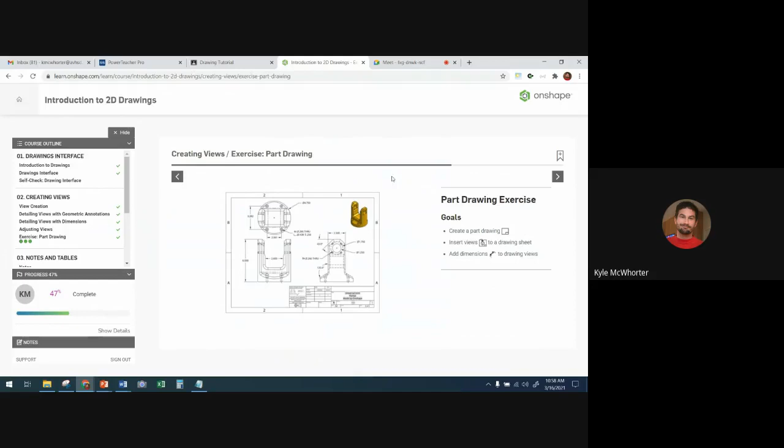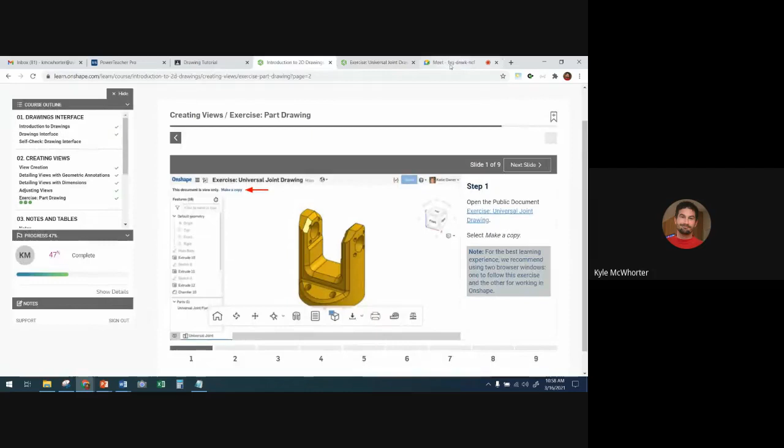Okay, so we are going to make these drawings, okay? So the first step is to open this public document. So you're going to click on this. And then we need to make a copy. So right up here where it says this document is view only, we need to make a copy. So click on that. You can name it if you want to. Change the name, put your name on it, something. So now we have our own copy of this part to work with.

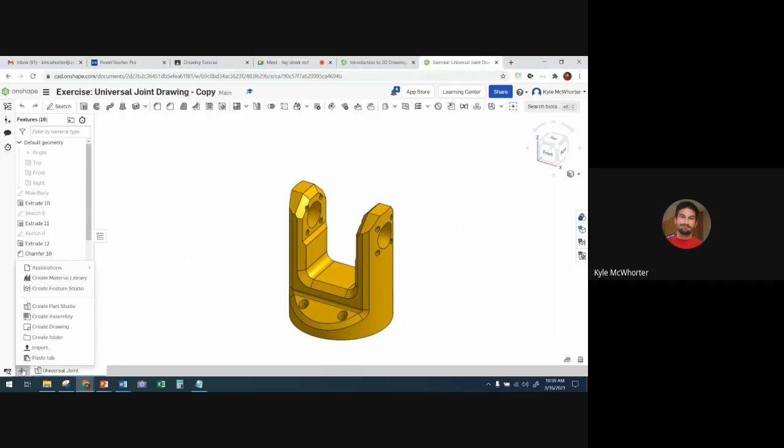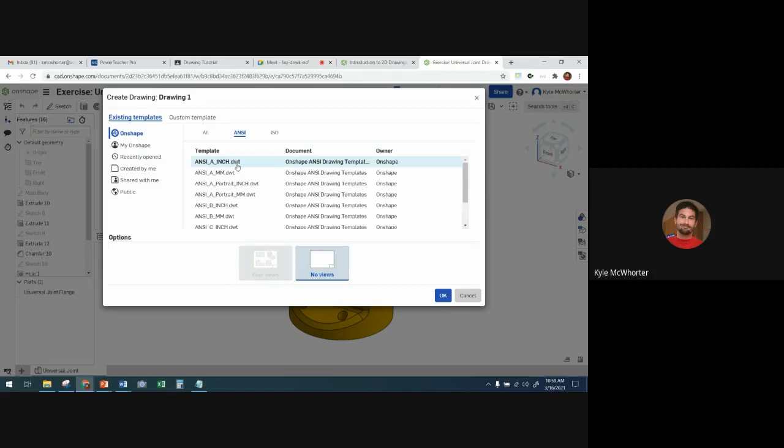All right, so now we're gonna hit the plus sign over here on Onshape and create a drawing. So we're gonna add a tab, create drawing. Now, see mine says recently opened, yours is probably gonna be blank the first time you open it. So if you just go up here and click on Onshape, and then click on ANSI, the one you wanna pick is ANSI A inch. And that is just the template for the paper. Then it automatically opens up this dialog box. So ANSI A inch, you have to remember to click on Onshape if it hasn't got one yet.

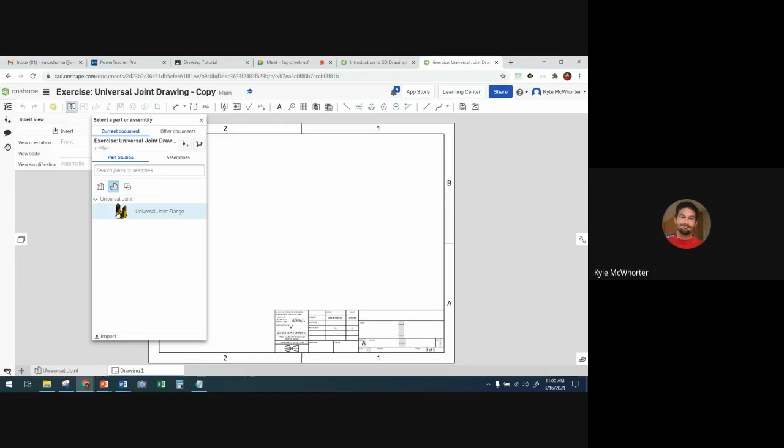Now we're going to use this dialog box to insert a front view of the universal joint flange. Remember, we don't want to click on the part studio. We want to click on the actual part. It's a front view with a scale of 1 to 2. So up here, if I was to click here, that would be trying to just put in the whole part studio. So I need to come down here and just pick the part. And then it's a front view, but I want it to be a 1 to 2 view scale. And then you just click to place it.

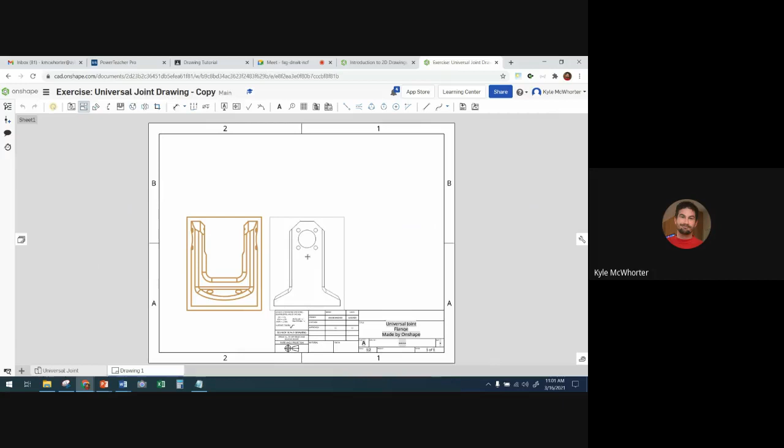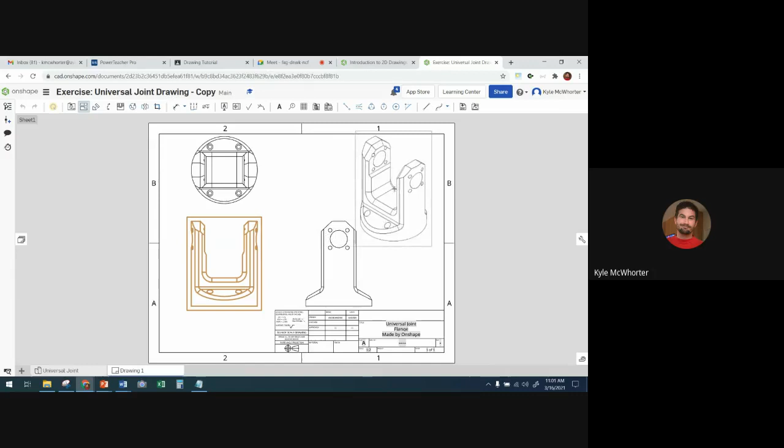And then it automatically is ready to place either the side view or the top view. Wherever you click next, it'll place that view. Then it automatically switches over to projected view. It used to be right here, insert view. And while it's on projected view, you can click on one of the views and do another projection of that part. You can also click on it and move diagonally, and you can get this isometric view.

Okay, so what were we supposed to do? Change scale 1 to 2.

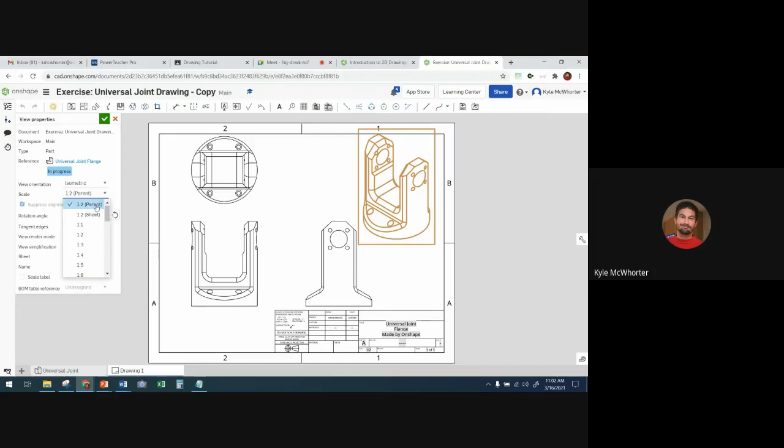So we want to put a top view, a right view, and an isometric view. We did that so far. So then we're going to toggle off that tool. So we just push the button to turn it off, or you can hit escape. Then we want to right click on the isometric view and select view properties. Right click, view properties. We're going to change the view scale to 1 to 4 and then accept. So here's the scale. We're going to change it to 1 to 4 and then accept.

Then we're going to change the isometric view to be shaded. So we right click and then show shaded view. Then we need to show the hidden lines and change the tangent edge display to be phantom for the 3 orthographic views. So hidden lines and tangent edge phantom.

That'd be a good band name, Tangent Edge Phantom.

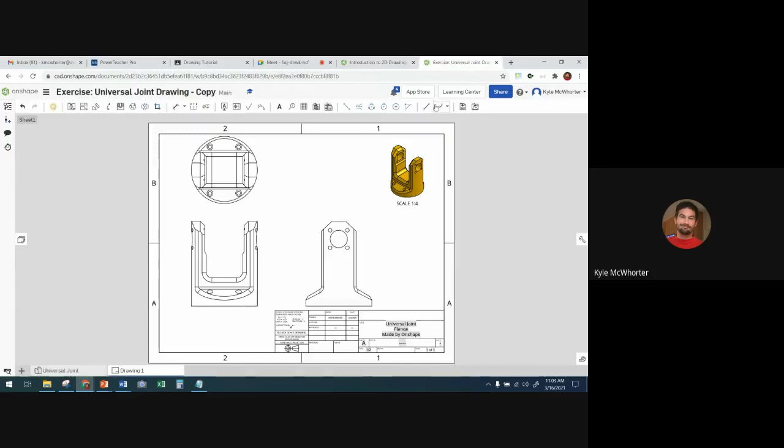Okay, so for these, you just click to select all three, then right click and do show hidden lines. And then select them again, right click, and then tangent edges phantom.

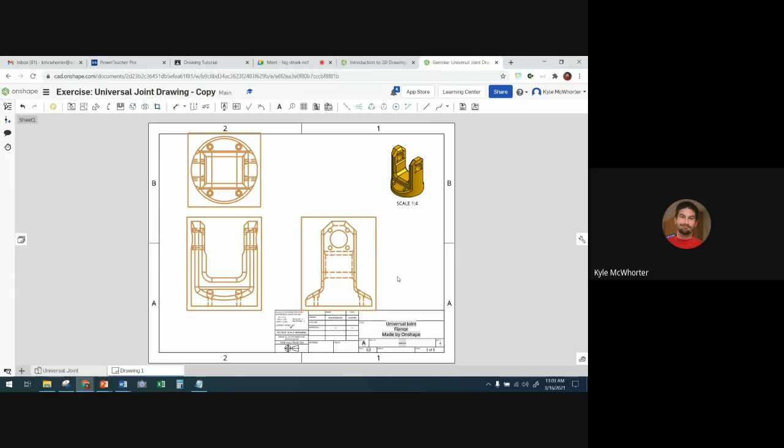I always like my tangent edges phantom. Just sounds like fun.

Now we are going to right click on the drawing tab and rename it to Universal Joint Flange Drawing. So instead of drawing one, right click, rename, Universal Joint Flange Drawing. Enter.

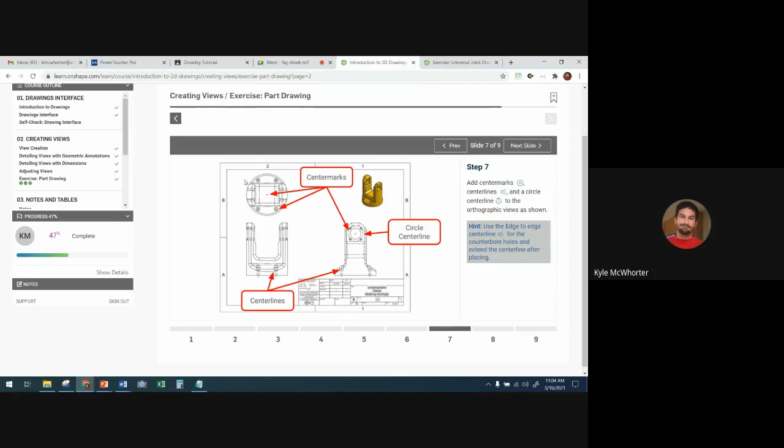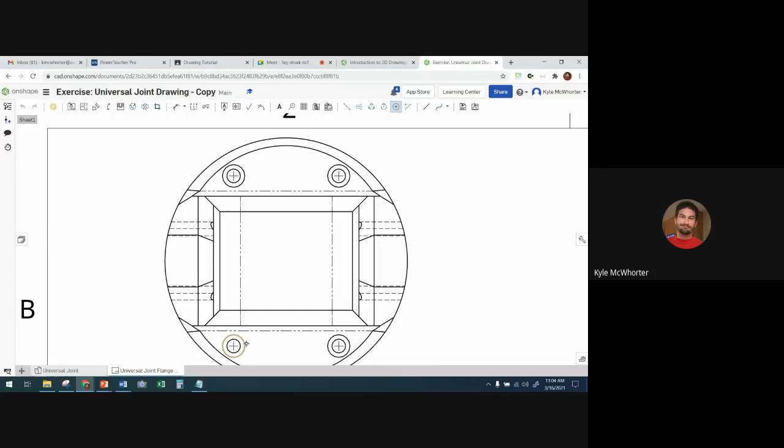Now we are going to add some geometry markings. So we've got center marks at the centers of these circles. The circles that are facing us, we need to put center marks on. So the center mark tool is here. And you use it just by clicking on the circle and it'll put a center mark at the center. And then also one for the center of the big circle. Then we've got some circles facing us over here. All right, and that looks like all the circles that are facing us straight on.

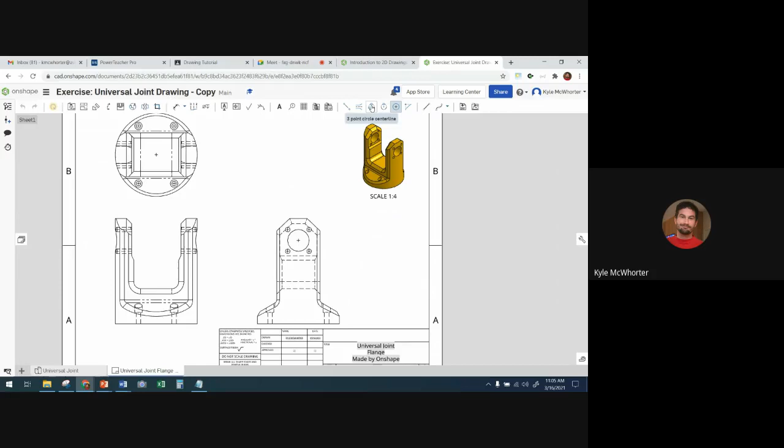These circles here are on a circle center line. So what you can do is pick either one of these circle center line tools. The 2-point one, you click on the center and then one of the points; this one, you just click on 3 of the points that are on the circle. So if I was doing that, I would just click on the 3 centers here, and it's going to make that center line circle there.

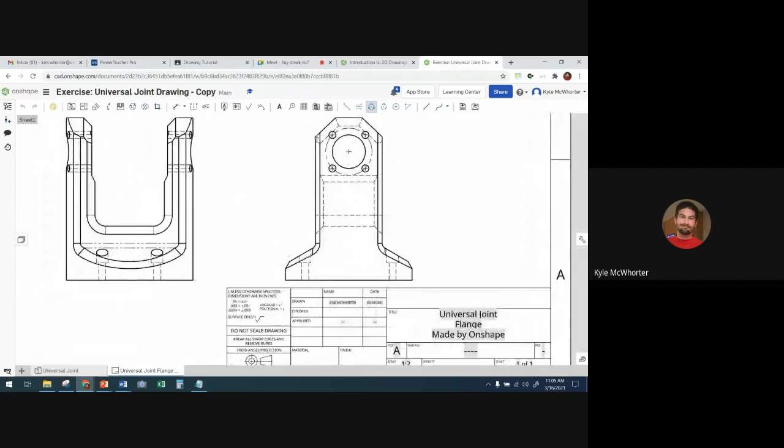Then we've got center lines for these holes that are cylindrical. So anytime you're looking at a cylinder straight on, you need a center line. So there's a couple ways to make center lines. Here's the 2-point center line. So you can say, all right, I want to start up here and then go down to here. Did that work?

Okay, this one probably works better. Instead of 2-point center line, edge to edge, so you can just tell it where to be in the middle of. And then, since this doesn't extend all the way through, you can exit out of that tool and then select it and just stretch it so that it extends out past the end of that cylinder.

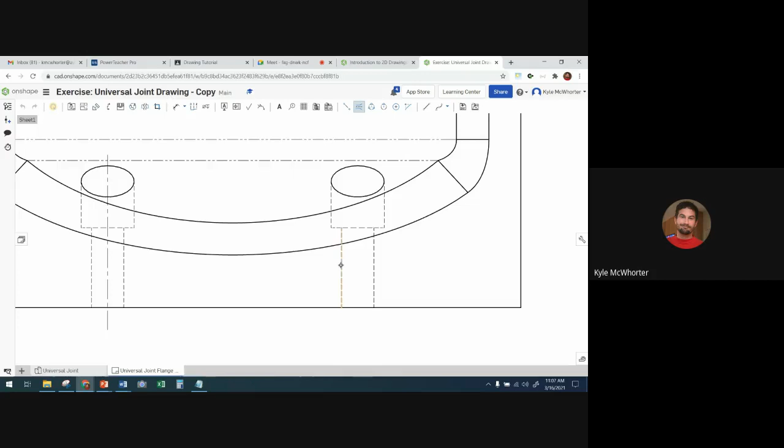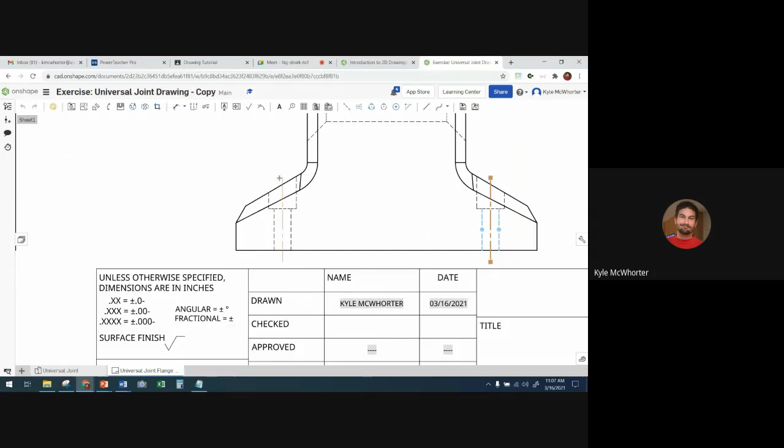This one. Side to side. And then escape, and then stretch it out a little bit. Side to side, side to side, then escape and stretch it out. All right, so now we've got our center lines in there, our center marks, and our circle center line there.

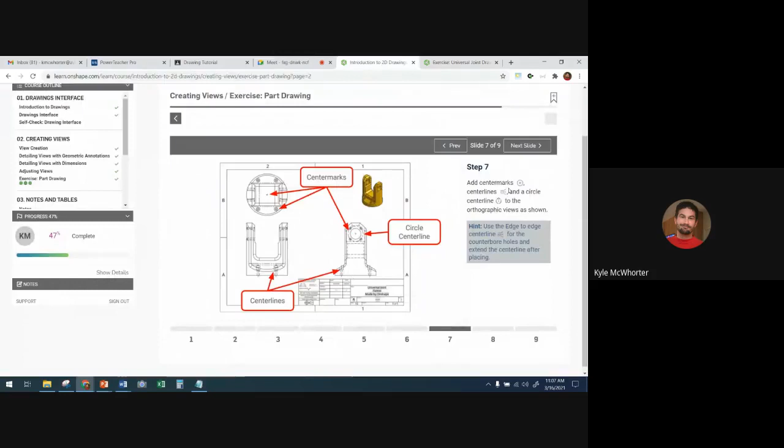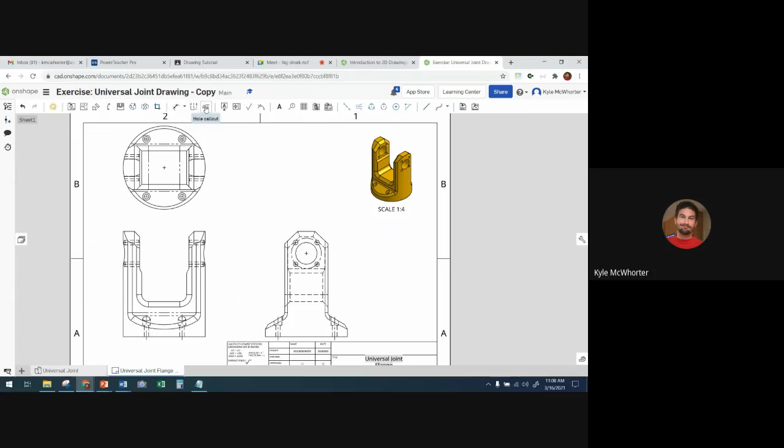Then we are going to use the hole call out tool, because they use the hole tool to drill these holes. On the video, it was part of this drop-down menu here, but on my version, it's just its own button, the hole call out tool. So you just click on the circle that's part of your hole,

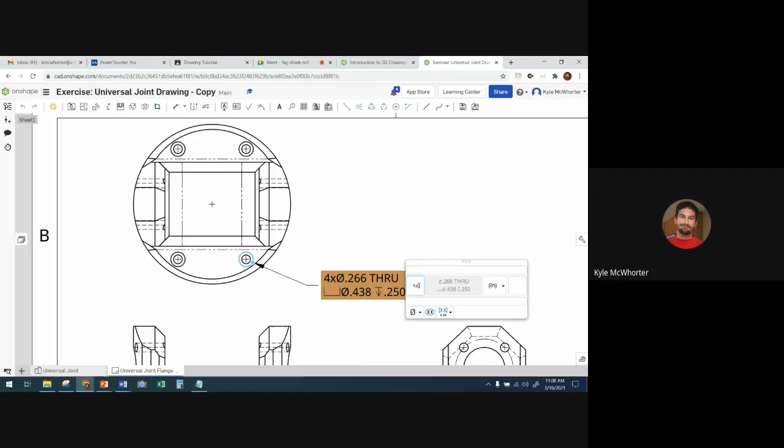place that. And remember how they wanted you to do a prefix and they said to right click, but I guess this is a newer version because it just gives you this little thing here. As soon as you hover over that, it gives you all this. Here's your prefix, so I would type my 4 times and then space. This would be if you had a suffix, something at the end, and this is just a general note at the bottom.

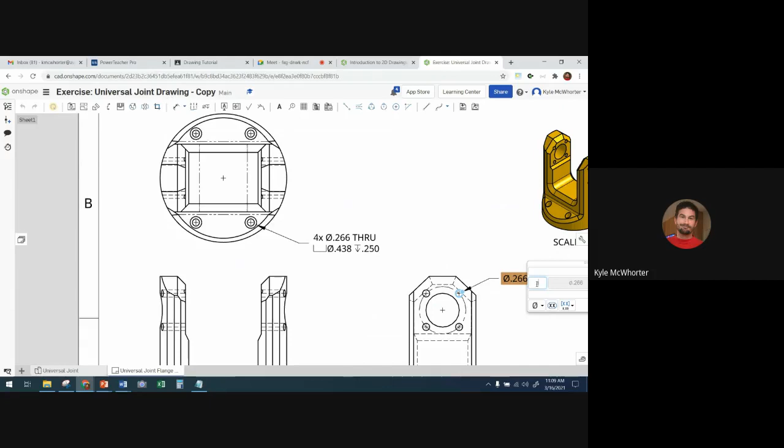So there's that one. And then the other ones, it's these little holes, and 8 times is my prefix there. Eight times. Now I've got my hole call outs.

We want to put a diameter dimension on this big outside circle here. If you're just using the regular dimension tool and you click on it, notice how it's only highlighting an arc. It's only going to give you the radius dimension. So I'm going to hit escape because I don't want that. I have to go down and use the diameter dimension if it's something that the computer is going to interpret as an arc. So there's my diameter dimension.

Where else? I got a diameter. I can use it down here on these guys, or since those are actual circles, the regular dimension tool will work on those. But you can, that has a diameter, that has a diameter.

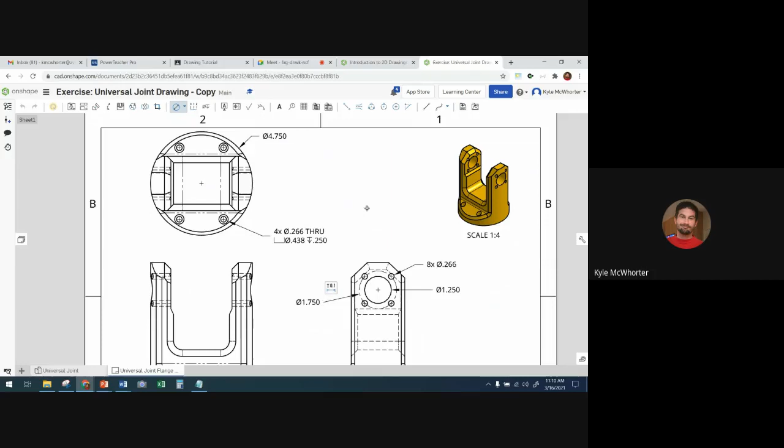And then I'm just going to switch to the regular dimensioning tool to dimension these linear things. So just the regular dimension tool. You can do it by clicking center to center, or you can just click circle to circle, and it'll measure center to center.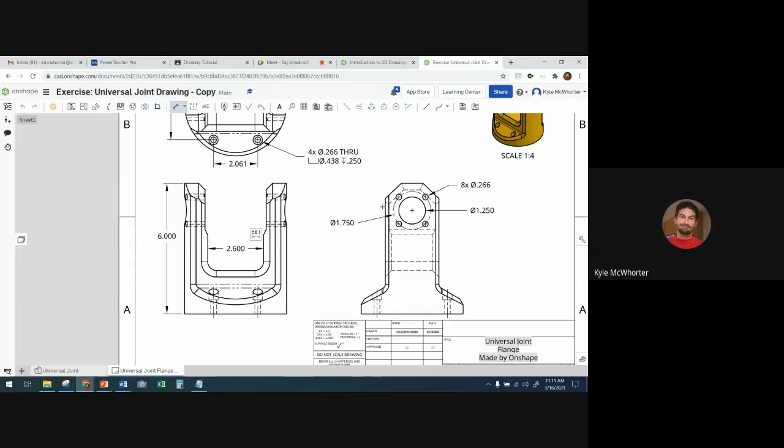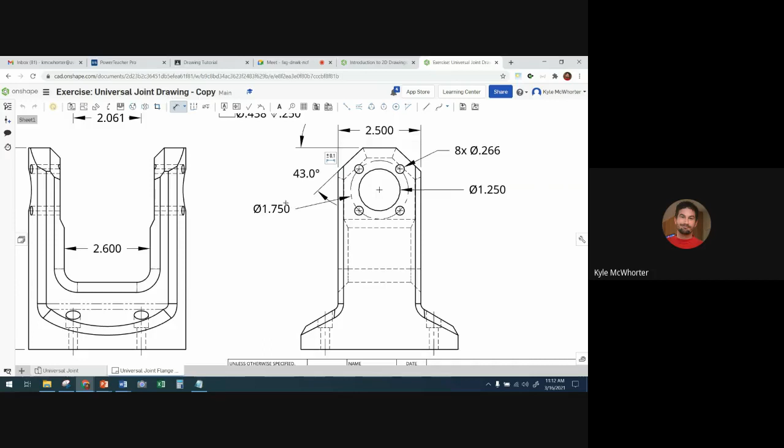And then we have some dimensions to put on this view. We already did these diameters, but the width here and the angle there and an angle down here. So the width, you would just go that side to that side. To do the angle, you just click on that line and then another line that you want to measure the angle between. And then there's another angle measurement down here.

Once you have all your dimensions that you want to show, you want to escape from the dimension tool and adjust things so that it's easier to see, right? For one thing, I might want to scoot this guy over a little bit because this dimension's kind of in the way. And again, this one's like a whole little paragraph, so maybe I'd rather have that one up out of the way a little bit.

And I can change where this thing is pointing, and say instead of pointing at that circle, just point at that circle because they're the same. So I can move that around. One thing I've learned is that they generally like you to move your leader lines so that they're not perfectly flat or straight, so that they bend a little bit. Because, I don't know, it looks neat.

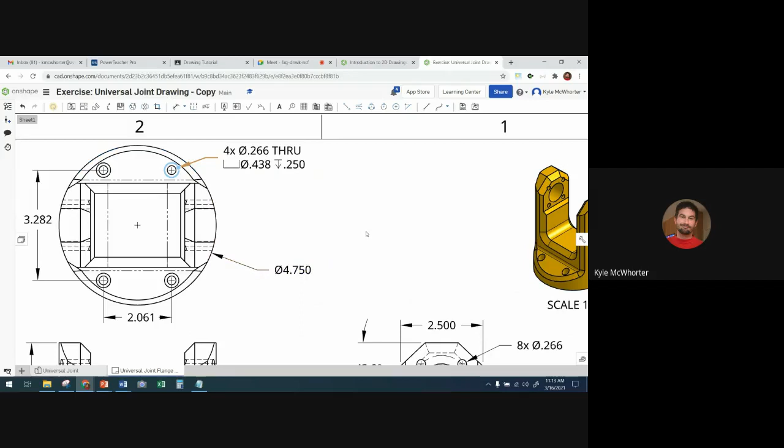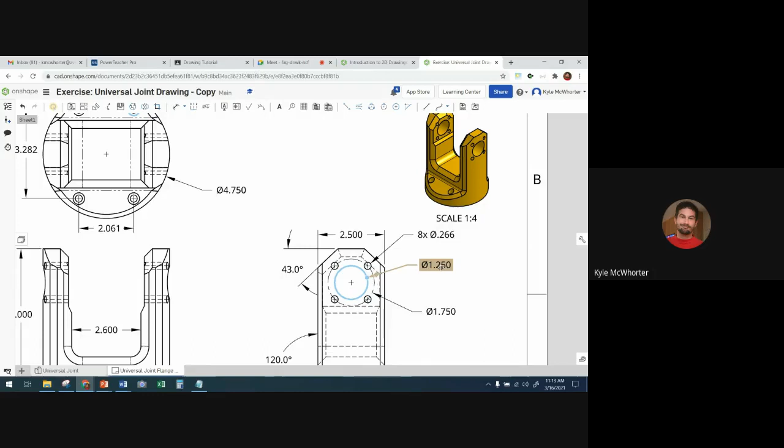What else? How can I make this a little bit easier? I feel like I have too many dimensions over there. This one, let's see, maybe I can go like that. Then they're a little close to each other. So you just want to space it out so that it's not quite as busy.

If you zoom in, it automatically preloads the name of whoever's doing it, the date that you're doing it, and the part that you're doing. So that's kind of a fun thing.

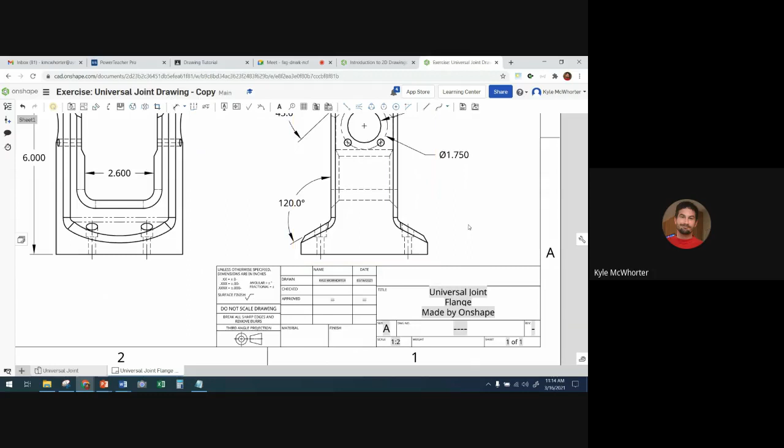Now let's see what else is next. Oh, that's it. So let me show you what you're going to do when you're finished with a drawing and it's time to turn it in. You're going to right click on the little tab down here, the same place where you would rename it, but instead of renaming it, we're going to export it. So I'm going to click export, and format is PDF, that's cool, and then just hit export.

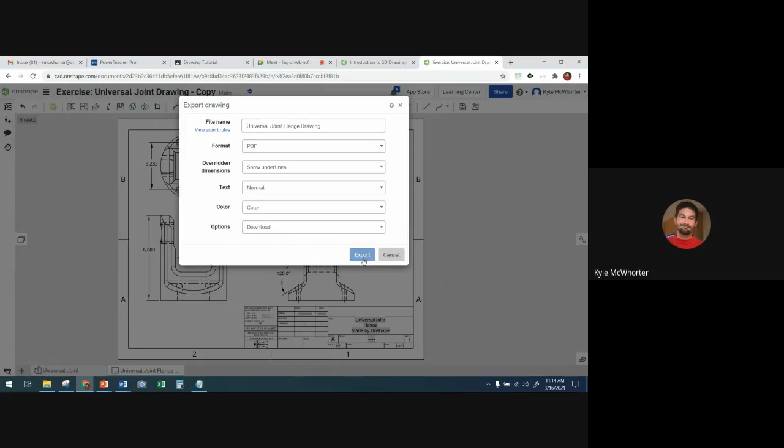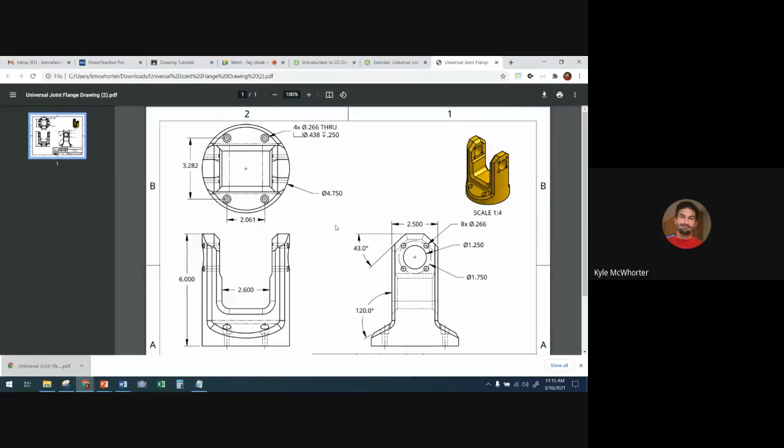Then it'll tell you it's getting it ready, and you'll get one of these little pop-ups down here in your browser once it's ready. It'll download here. Then you click on it, and here is your PDF. So when I request you to turn in a drawing, you're going to do that export PDF thing, and it already has your name and date on it and everything. And that's how it goes.